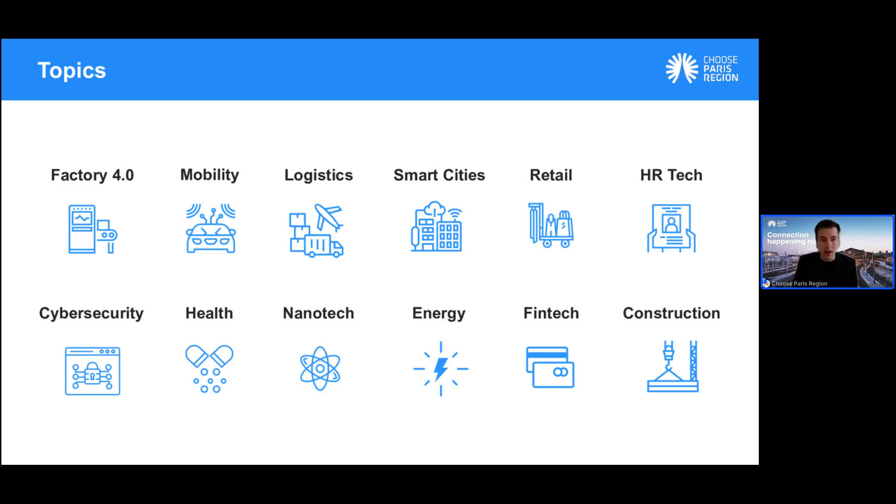Before we go to the overview of the hydrogen industry, I wanted to present the person in charge of the hydrogen department at Choose Paris Region, Sevinch Shimo. She couldn't be here today with us, unfortunately. So I'm going to give you some information about the industry and the different initiatives in the Paris region.

The Paris region is a key territory for the sector of hydrogen in relation to the energy transition. The region has pledged to make renewable energies account for 40% of Paris energy consumption by 2030 and for 100% by 2050. It's a big objective. Hydrogen is key for reaching this target, as the region aims at developing the value chain of green hydrogen based on local renewable energies.

In terms of application, we especially count on hydrogen for mobility and for small and medium-sized industries. We can see an increasing number of projects between industrial groups, institutions, and intensive transport players. Of course, not to forget the 2024 Olympic and Paralympic Games will be the first carbon neutral games and showcase the region's hydrogen solutions for athletes and spectators' transportation and electricity supply.

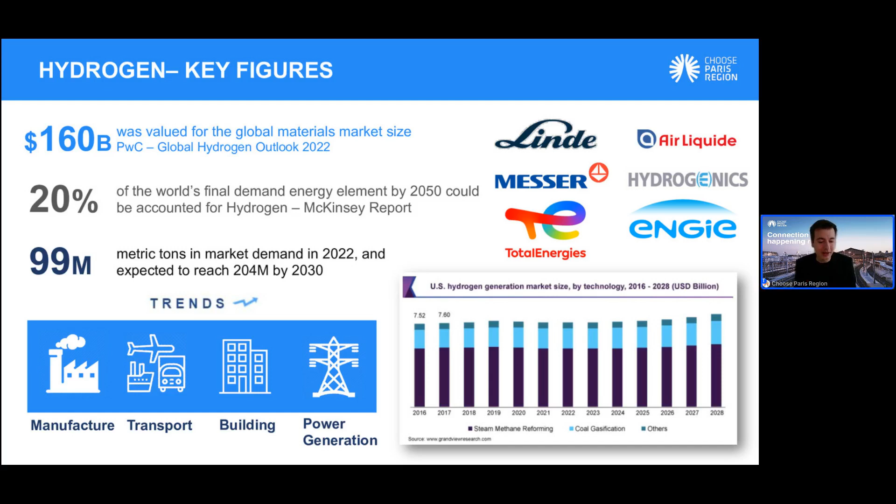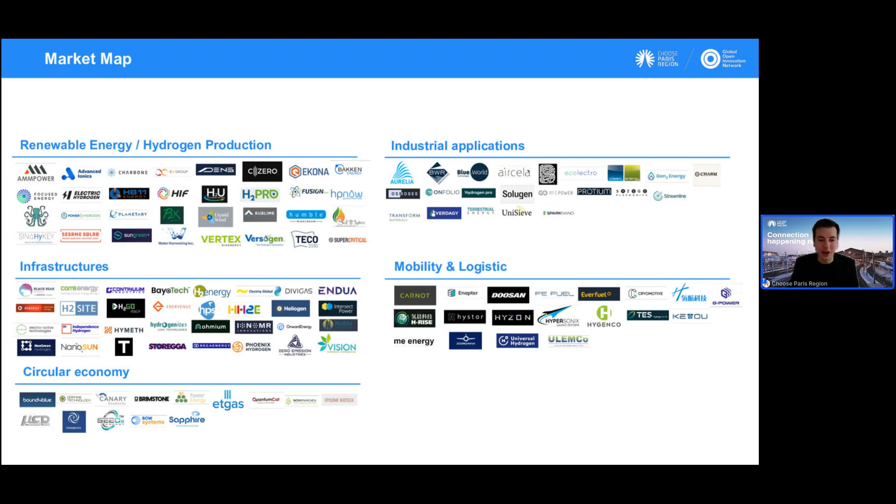Great. So without further ado, I'm going to invite our two experts today for the fireside chat. So Frank and Pete, if you can join me on stage. Hi, Frank. How are you doing? Hi, Florian. Hi, everybody. I'm very fine. What about you? Good? Yeah, I'm doing great. Thank you for being here today. So we're just going to wait for Pete. I believe he had some issues. Okay, I think he's here. I'm just going to invite him.

Great. So maybe we're going to first start with a presentation of yourself and the company you're representing, or the different initiatives at Engie, Frank, while Pete joins in a second. Okay, great. Thanks, Florian. Good morning, good afternoon, everybody. I'm Franck Le Baron. I'm working at Engie at group level for coordination around hydrogen, so I'm really dedicated to hydrogen. At Engie, we've got two feet. We are a gas company. We are a renewable energy company. So hydrogen is in the middle.

Hydrogen is in the middle because when you think about hydrogen today, I should have started with that. I don't know how familiar your audience is with hydrogen, but why are we talking a lot about hydrogen? What is new? Hydrogen has been used in industry for decades. There is... Yes, go ahead. There is noise, Frank. Yeah. Okay, that's better now.

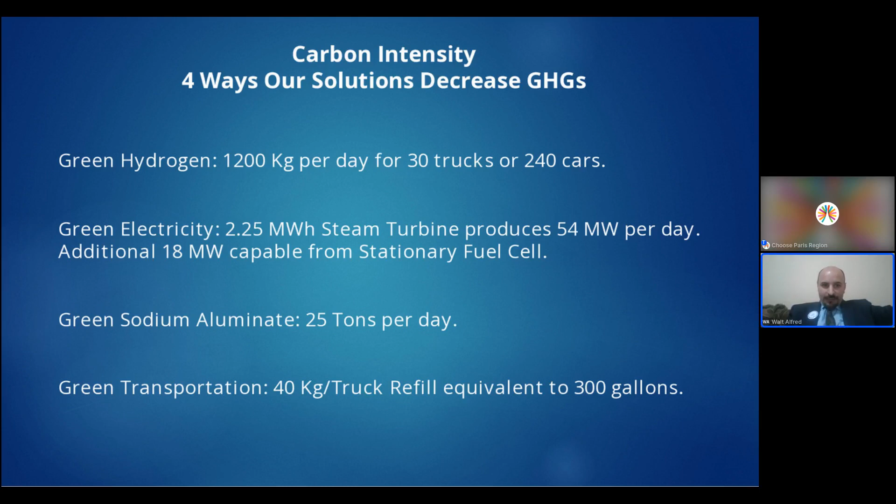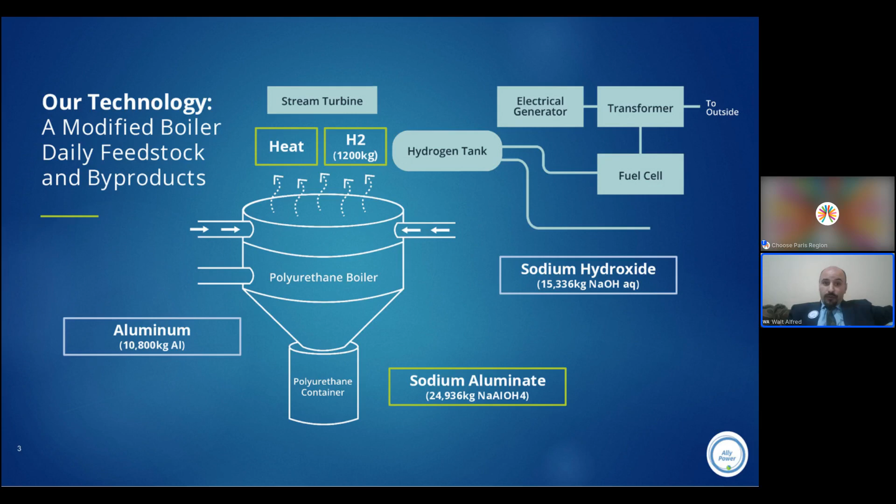Next slide. So this is a look at our patented hydrogen and electric refueling station, and this is how the back end of the station works. We feed aluminum and sodium hydroxide into the boiler, and that generates heat, hydrogen, and sodium aluminate. The electricity that we generate is given 2 different choices, to either charge electric battery vehicles or go to the grid. And the hydrogen that we generate is also given 2 choices, to either be dispensed to vehicles or be run through the stationary fuel cell. Next slide.

So as the previous speakers were talking about in terms of the hydrogen hubs, our solution kind of fits within that by being a distributed hydrogen station. We can place our stations along interstate highways to enable the hubs to be connected. Our stations will have a small footprint, around 2 acres, and provide on-site generation of electricity and hydrogen through the chemical reaction of aluminum, water, and sodium hydroxide. Next slide.

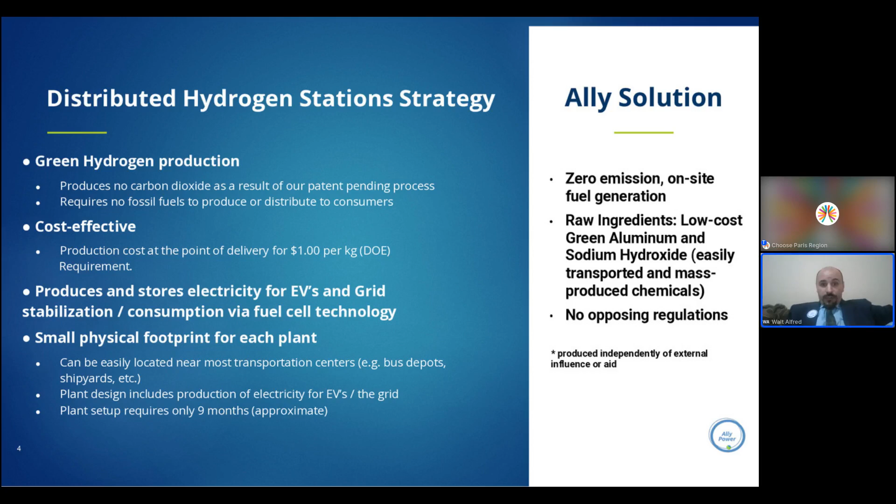And then the hydrogen produced on site will be given the choice between dispensing to vehicles or going through the stationary fuel cell. Next slide, please.

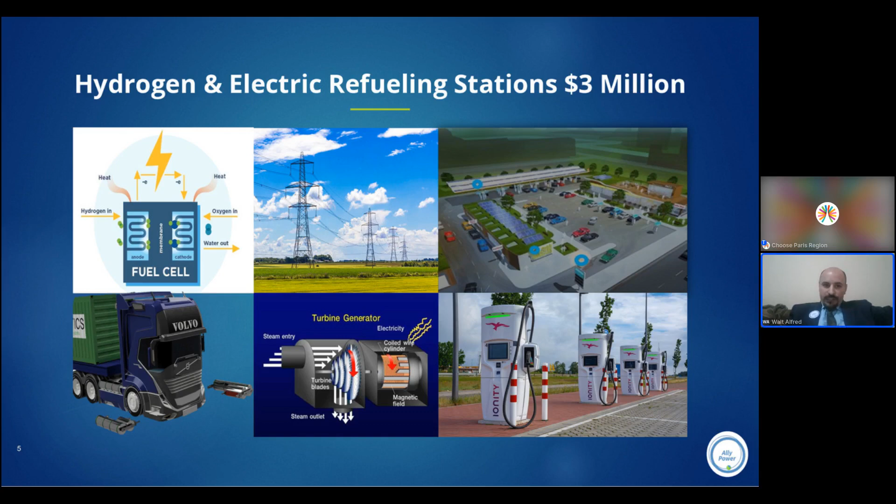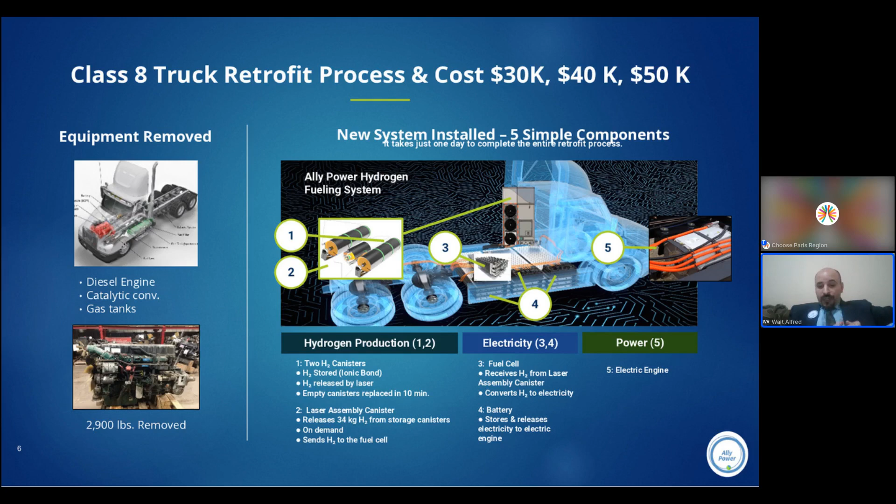This is a look at one of the vehicles that we are looking at in terms of retrofitting. We plan to take out the existing engine as well as the catalytic converter, put in a hydrogen fuel cell as well as a hydrogen storage system, and that will make the vehicle into a hydrogen fuel cell zero emission vehicle. We do have three price points for this conversion. The first will just make the vehicle zero emission, the second will extend the range, and then the third will provide extended range and vehicle-to-grid capability. Next slide, please.

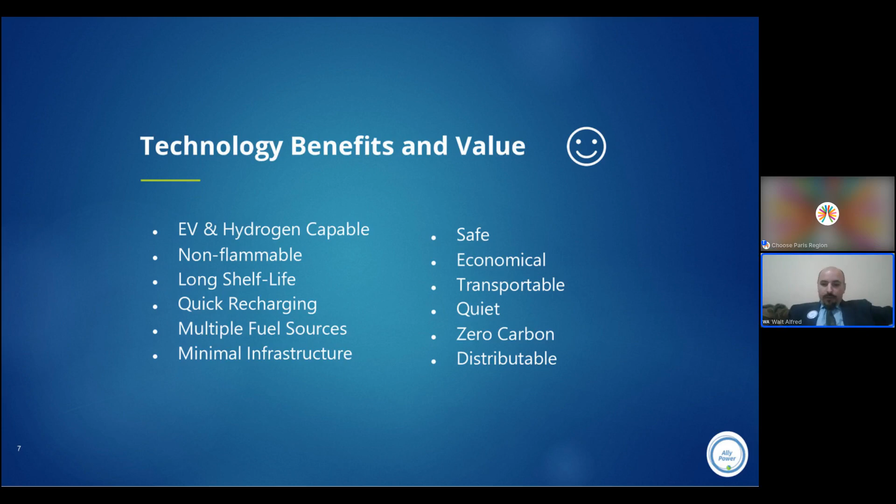So some of our technology benefits and values for the stations as well as the retrofits. We will be both electric battery vehicle as well as hydrogen capable. We plan to be safe, economical, distributable, and zero carbon. That's one of our major points, is that we will be zero carbon. Next slide.

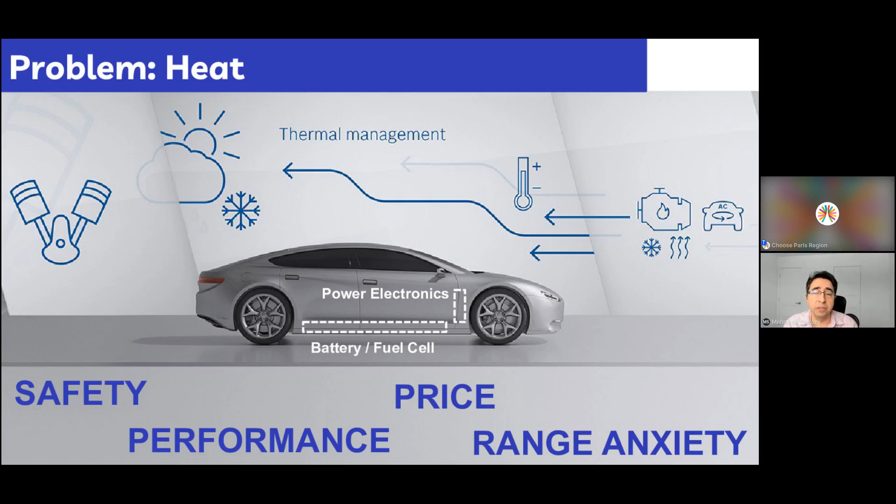This is our solution. It is called Uni.T for uniform temperature. As you can see, it looks like thin metallic plates. However, it has a thermal conductivity 10 times more than copper. It can also reduce aging in basically electric and hydrogen systems by 30%. It can increase the range in winter conditions for electric vehicles by 35%. And also it is passive, no connections, very reliable and low cost solution.

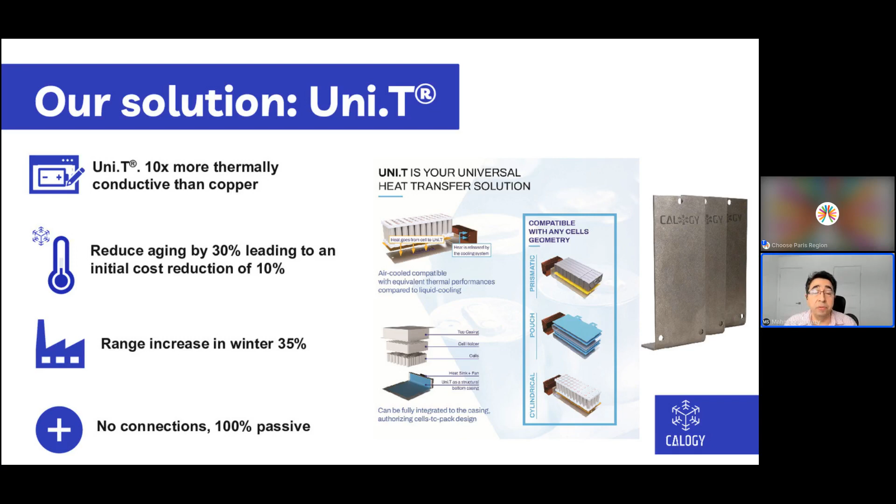For the batteries, it is compatible with prismatic, pouch, and cylindrical, and we're now exploring the use of this for the thermal management of fuel cells. Next slide, please. The way it works is based on the heat pipe legacy. So basically liquid vapor phase change. That's why it can offer this very high thermal conductivity. It is thin and, as I said, very lightweight. Next slide.

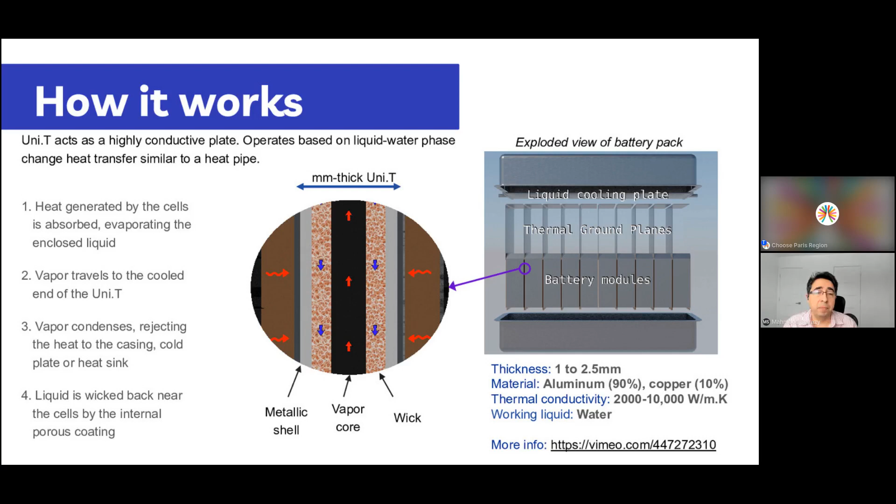So for the fuel cell, it's an application that we are exploring now. Thermal management in fuel cells is an issue because the fuel cells generate a lot of heat and they need to operate in a specific temperature range. Our solution has some interesting features. First of all, it is thin, it is lightweight, and it can be put between the bipolar plates. It can provide a uniform temperature, which is extremely important in the lifetime of both fuel cells and batteries. And it has a very high heat capacity. It can transport a lot of heat without any problem.

In terms of integration, it works great with air cooling systems. I mean, better or equivalent to liquid cooling systems, which is really an innovation. It is low cost, very reliable, as I said. And also we can imagine creating microchannels for air and water transport to be used directly as bipolar plate in a fuel cell. Next, please.

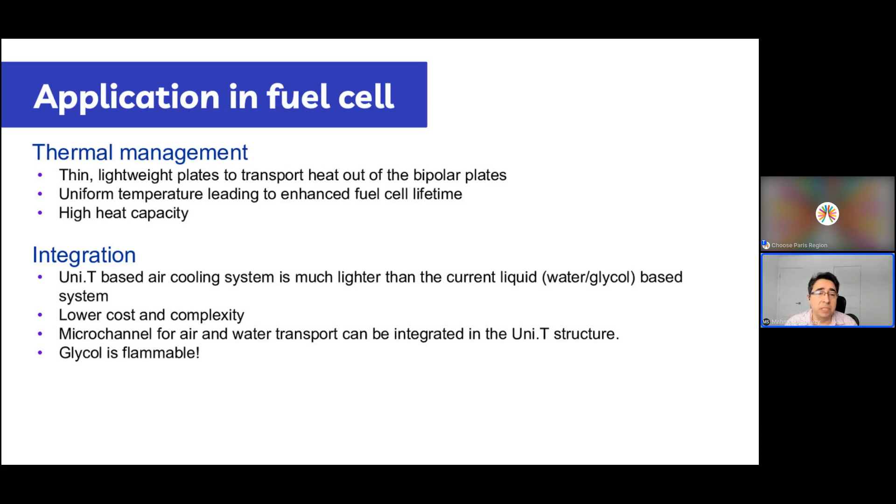So these are part of our customers and collaborators. As you can see, in lithium-ion batteries, we work with companies in aerospace, Bell, Unither. We also work with a large automotive OEM. For hydrogen, we're working with Safran in France, also Bell, Unither again. And with power electronics, we're working with a large German technology company and a tier 1 automotive technology company. Next, please.

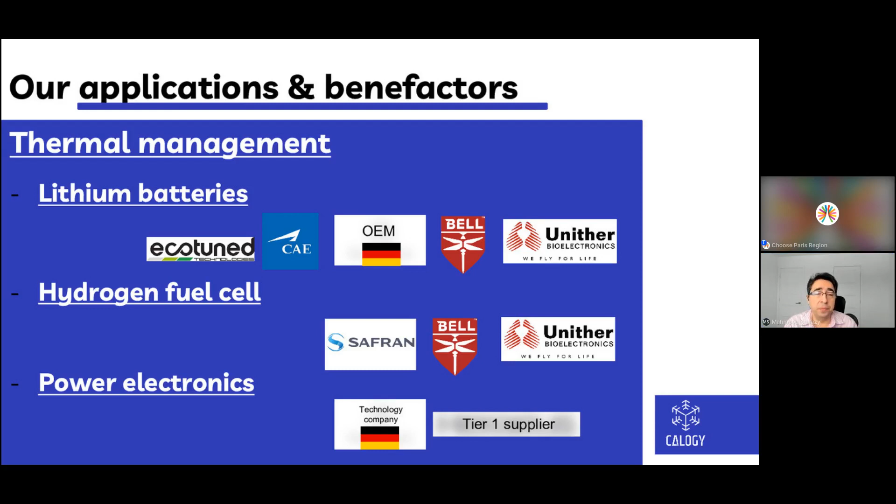So our business model is based on making and selling the components. We are basically a manufacturing company. We're not a consulting company. However, the first part of our projects starts with a thermal study. We look at the customer's current system, we analyze it, and then we propose a new kind of integration using our components. I should mention that we can offer, and we have actually done, the whole system, the turnkey thermal management solutions, and not only one component.

The next stage is that we prototype with the customers. We make some prototypes to test the results, and finally we sell them the parts. Our early adopters have been mostly aerospace and marine, so niche markets. But our goal is really automotive markets for the high volume expansion of the company. Next, please.

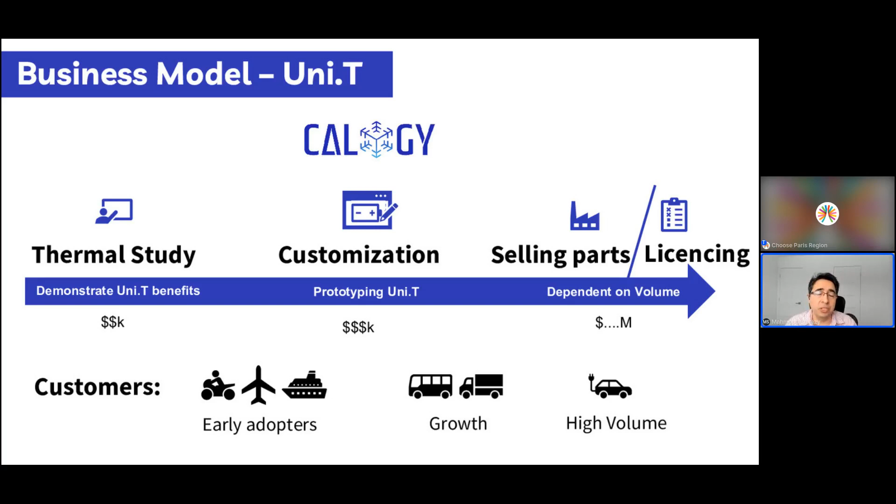So now why work with us? First of all, you will have access to an innovative and game-changing thermal management technology. It could be applied to a range of different thermal challenges in future transportation. As I said, batteries, fuel cells, and power electronics exist in all these vehicles at different levels.

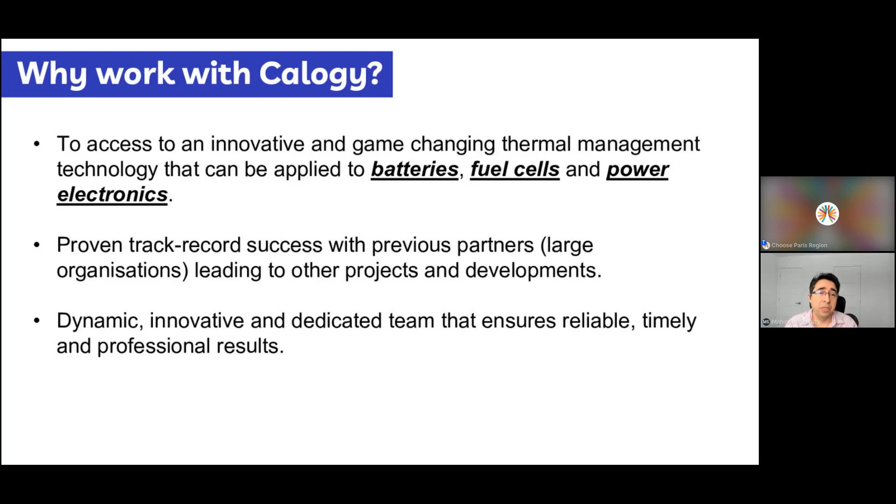We also have a proven track record of success with previous partners. We are used to working with large organizations, and typically they're very satisfied. They start with one project and then they bring other teams to work on different projects with us. And finally, we have this dynamic, innovative, and dedicated team that really ensures reliable, timely, and professional results for your company. Next, please.

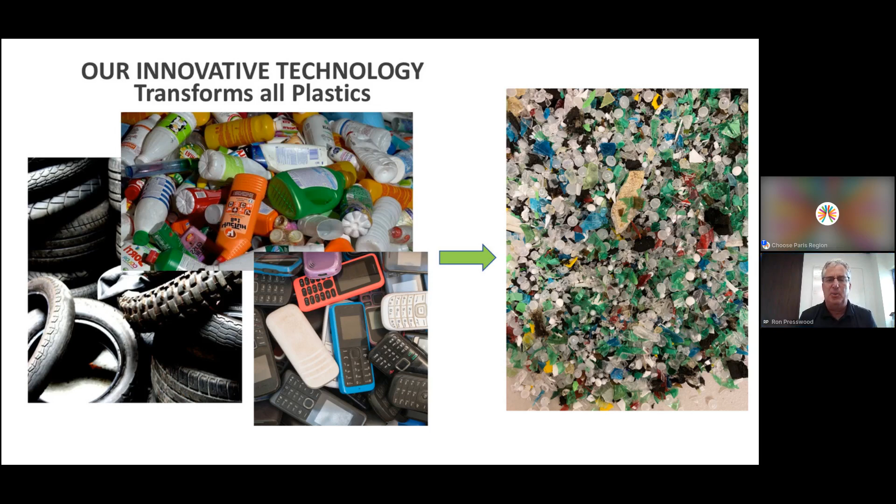So, there's a lot of discussion this morning on what hydrogen can be used for. We're in Texas, so there's a lot of hydrogen pipeline that runs from Louisiana all the way down the coast of Texas. So you have industrial transportation and hopefully growing into a home market. Next slide, please.

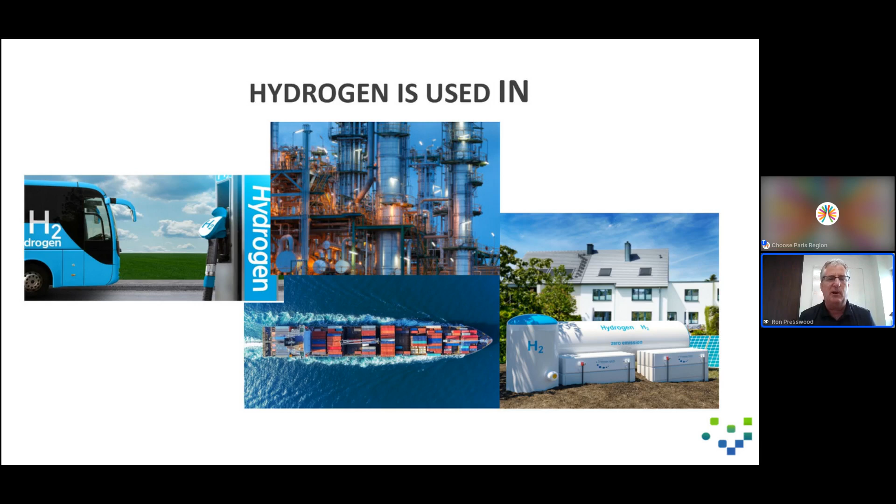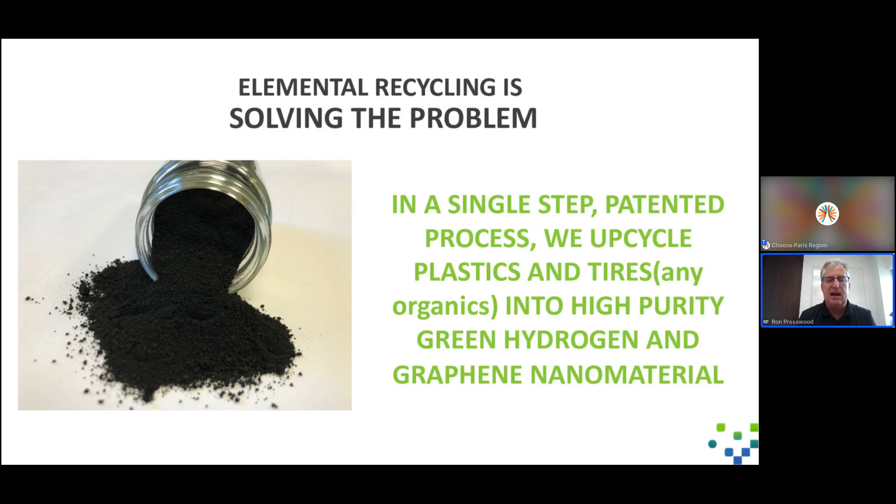So what we do is we have a single step patented process. We upcycle those plastics and tires, really any organic, and we produce a high purity green hydrogen and a graphene nanomaterial. Next slide.

So fairly simple process. We, as I said, single step. We can take any of the commercial plastics 1 through 7, virgin, contaminated, film, bioplastics. We run it through, and we break that down into the elemental bonds: carbon, hydrogen. You'll see some sulfur. There's sulfur in the plastic. But we recover all of that.

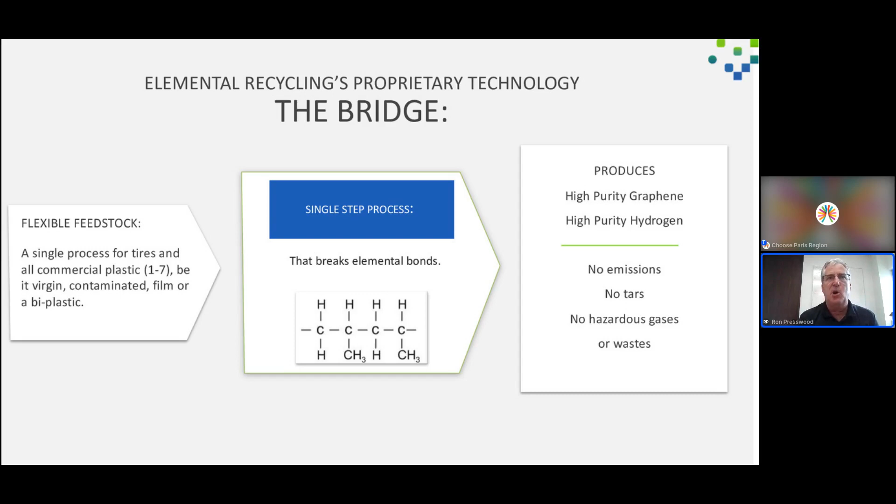So while we produce that high purity graphene and hydrogen, we have no emissions, no tars, no hazardous gas or waste. As a matter of fact, to date, everything that's come off the process has had a commercial value for us. Next slide.

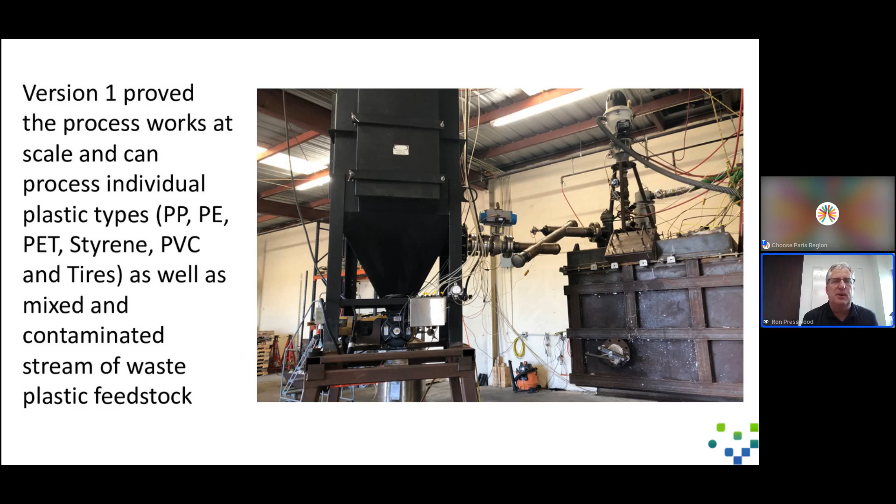So this is our version 1. This was the full-size test machine that we made. Through that, we ran polypropylene, polyethylene, PET, styrene, PVC, tires, a lot of material that was destined for the landfill. So floor sweep, other contaminations, it might have been titanium dioxide or labels or metals, but we ran it through this process. Next slide, please.

We're currently in the process of finalizing version 2. We're going to be doing acceptance testing of that machine the end of this month, and it will be delivered to our facility here in Houston. But the company that built the machine is international, so we can build these in Europe. We're actually talking to a company in Australia right now about partnering with them.

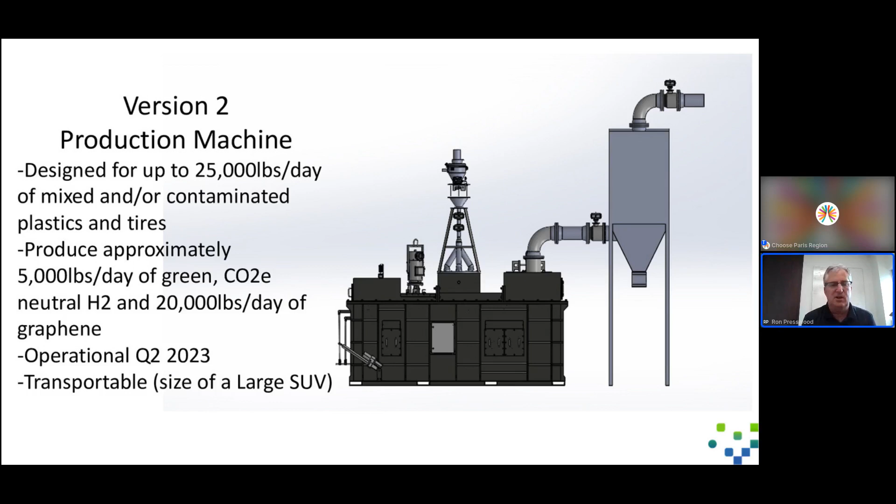Depending on the material that you put in, if you're putting in polyethylene, polypropylene, it's designed to run about 25,000 pounds in this current size of machine, and you'll produce about 5,000 pounds of green CO2 neutral hydrogen, the remainder being graphene. So the machine itself is about the size of a large SUV. Next slide, please.

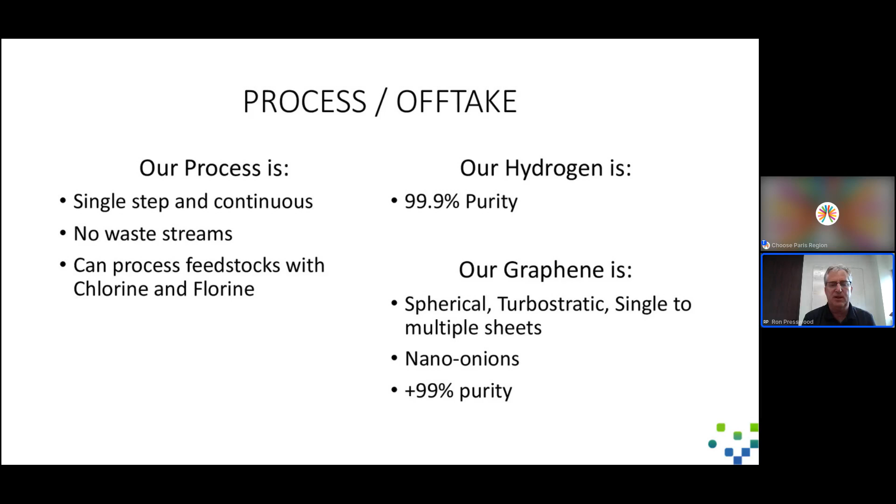So kind of a summary slide here. Single step continuous. We run 24/7. No waste streams. We can process a lot of feedstocks, including the halogenated, polyvinyl chloride, brominated plastics, those kind of things. Our hydrogen is 99.9% pure, and our graphene, we're making a spherical turbostratic single multi-layer graphene, carbon nano-onions, with a 99% purity. Next slide, please.

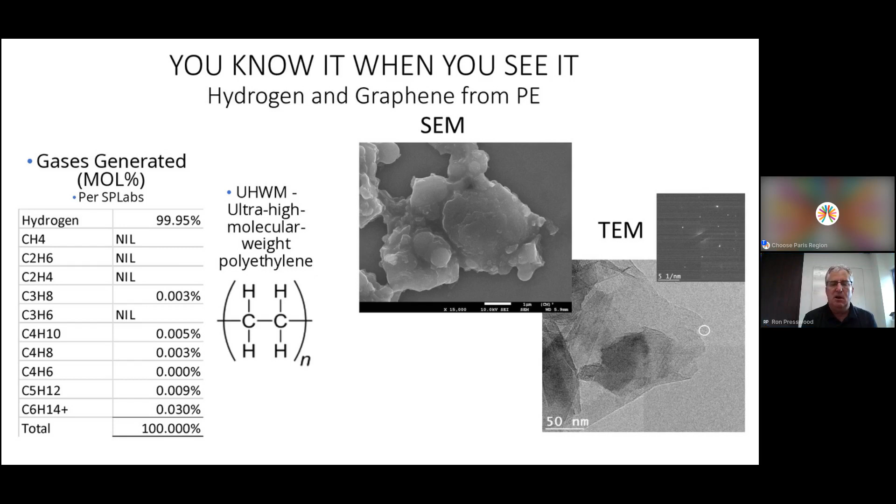So this is results. The gas sample was done by Southern Petroleum Labs here, and then images of the SEM and the TEM of the carbon that we've produced, the graphene. Next slide, please.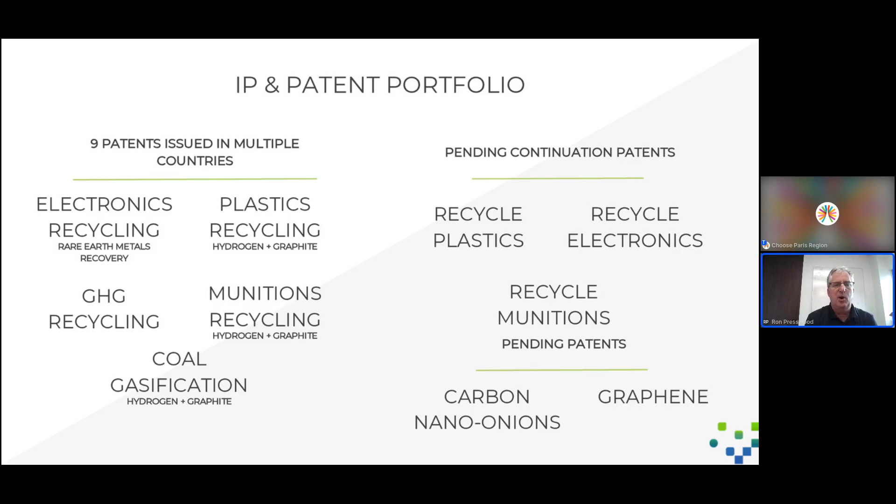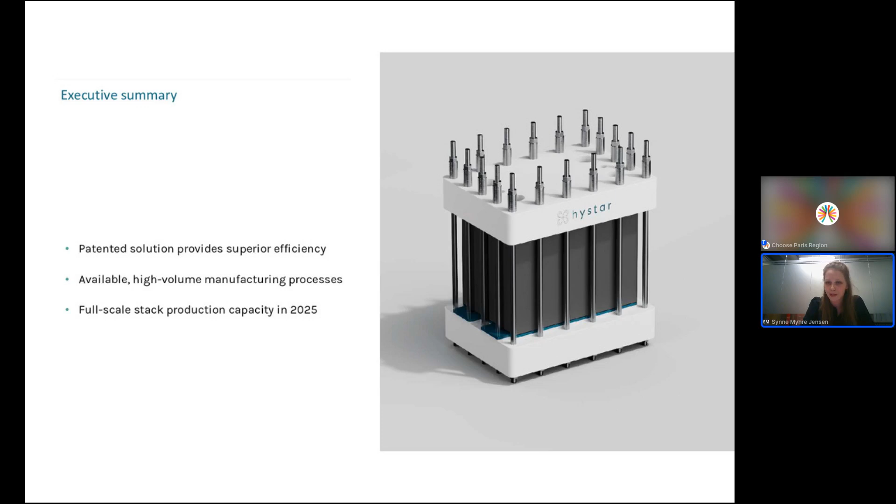On the left-hand side of the figure, you can see the conventional PEM electrolyzer. And in the middle part, you see the membrane. All electrolyzer manufacturers are trying to reduce the thickness of the membrane because the thicker the membrane, the larger are the losses in the system due to heat.

But here's how Hystar has solved this problem: hydrogen can cross over the membrane to the oxygen side, and if the membrane is too thin, this will happen, giving you an explosive mixture on the anode side. So how we solved this: we changed the water inlet from the anode side over to the cathode side. This opens up the possibility to ventilate with air on the anode side, so if any hydrogen crosses over our thin membrane, we can just dilute it with air.

This gives several advantages. We get a higher efficiency, and we get higher control of our stack, giving an increased safety feature. It also enables us to use components from the fuel cell industry, which are already standardized and mass produced.

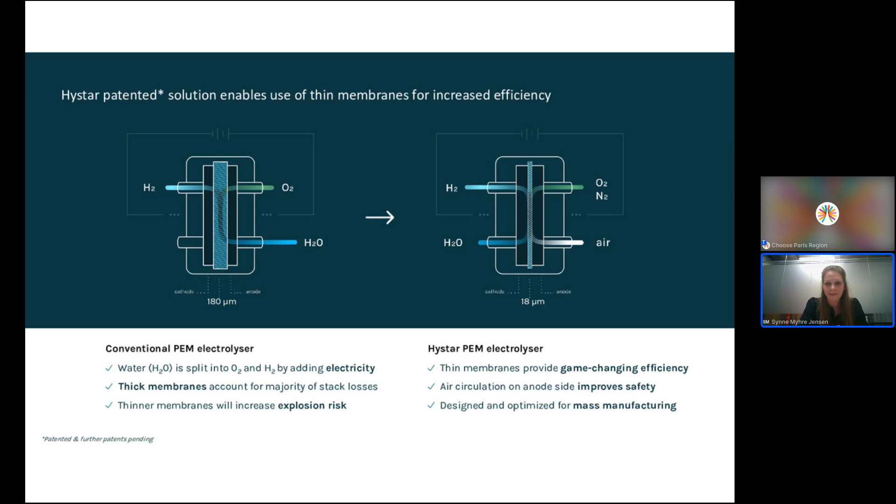We have 2 different ways of operating our system. We can either run it at conventional production rates, where we use about 10 to 15% less energy than others on the market. Or we can run it at the same amount of energy as other PEM electrolyzers, and then produce about 2 to 3 times more hydrogen from that energy.

So if you have a renewable system with PV or a wind park, when you have excess energy you can produce a lot more hydrogen in those time points, and then you get a much better business case.

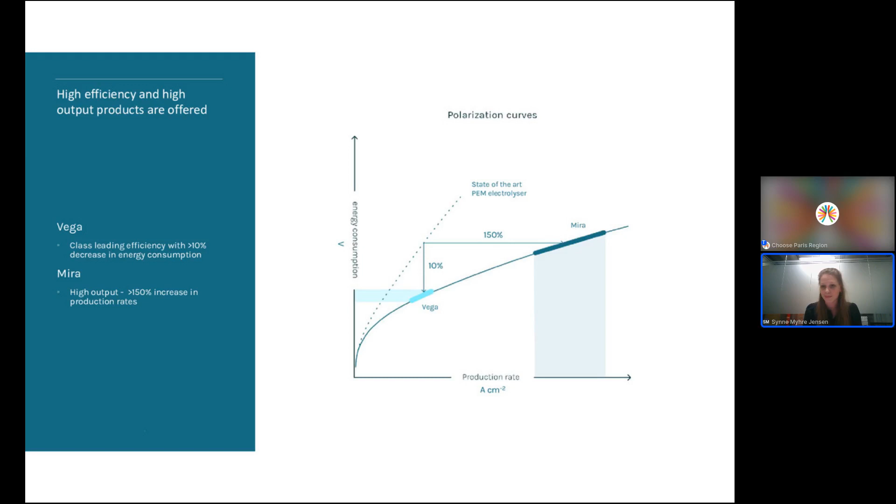At Hystar, we produce stacks that go into our containerized solutions, and we produce modules that go into large plants. At the moment, we have about 100 megawatts of production capacity for the coming year and about 200 megawatts for next year, and in 2025 we will have over 1 gigawatt of production capacity.

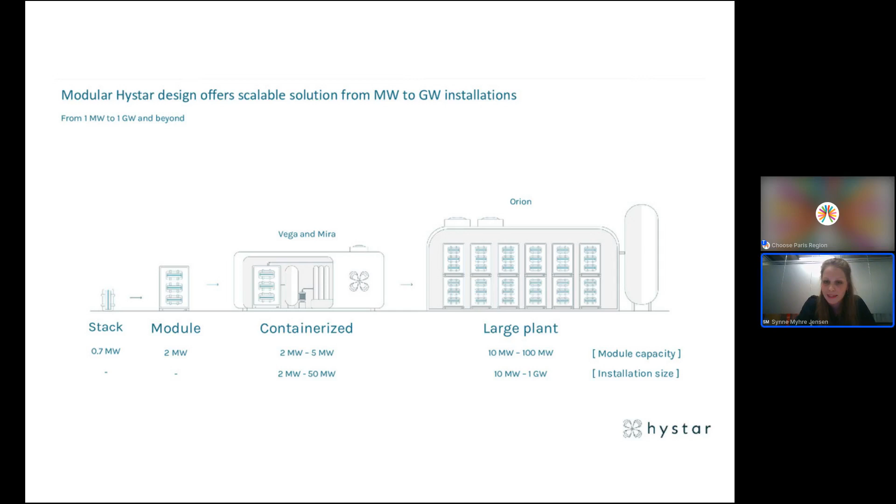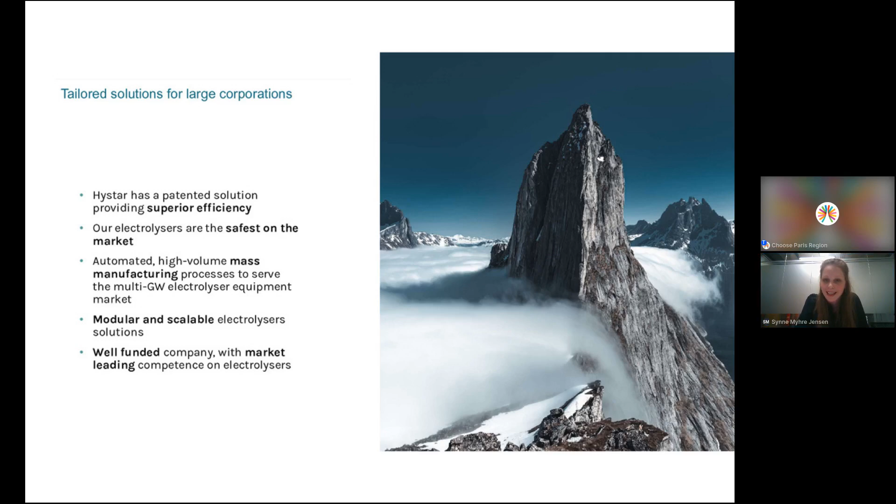At Hystar, we have a patented solution providing superior efficiency. Our electrolyzers are the safest on the market. We have an automated high-volume mass manufacturing process to serve the multi-gigawatt electrolyzer equipment market we've been talking about today. Our solutions are modular and scalable, and we are a well-funded company with market-leading competence on electrolyzers.

I would just like to add that if you want to discuss more about how we can look into electrolyzer systems, please get in contact.

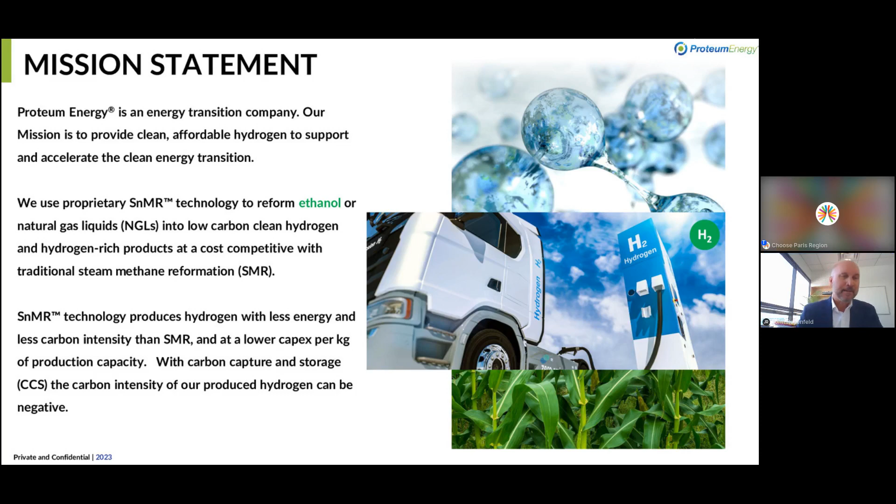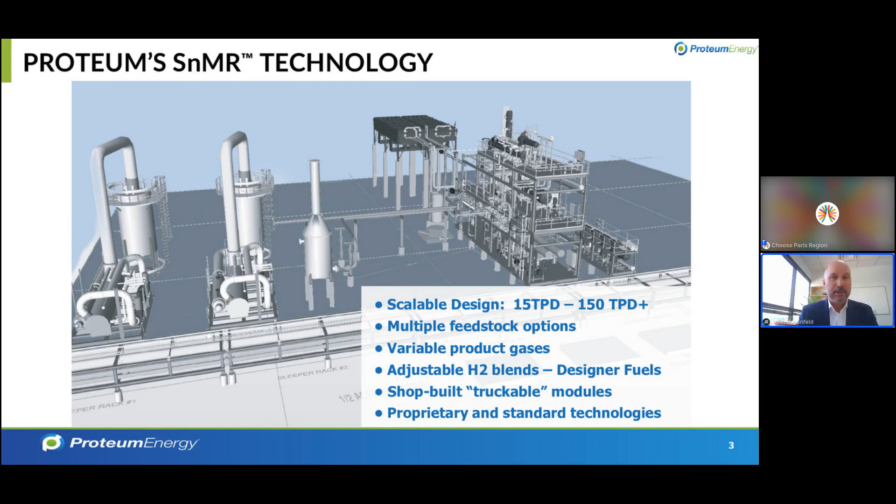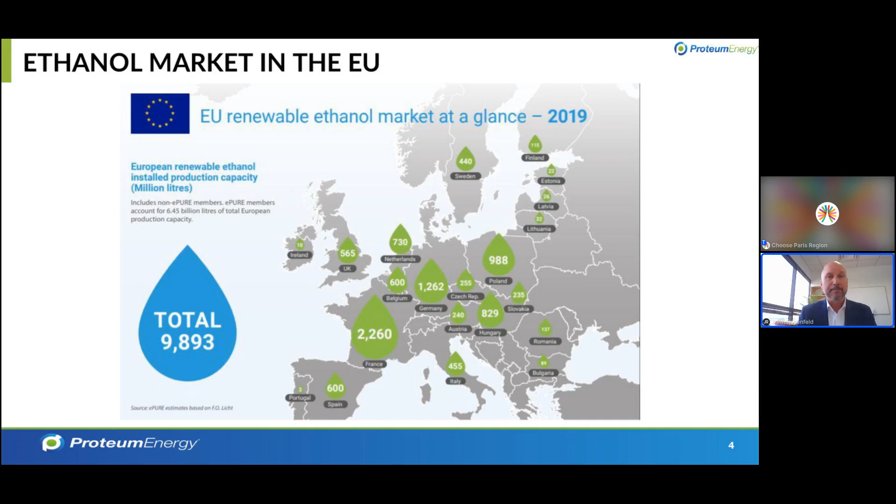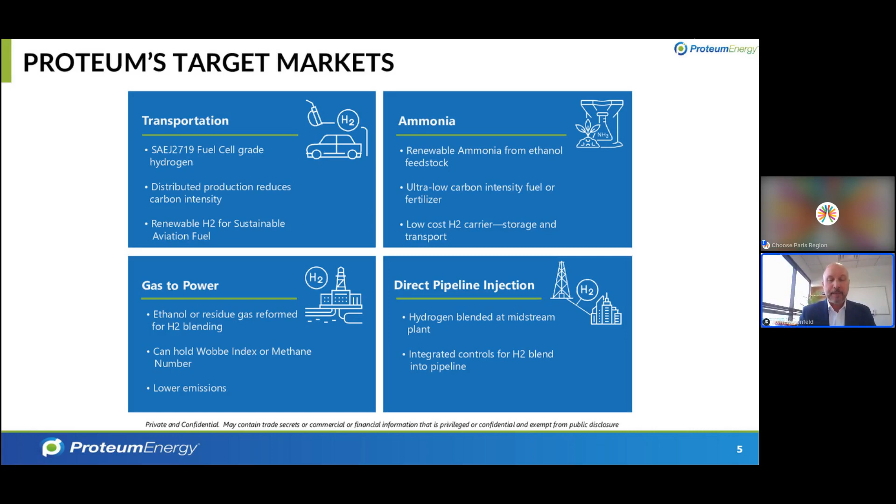Our target markets are transportation, gas to power, direct pipeline injection, and low carbon ammonia. On the transportation side, we're working with fuel cell truck manufacturers and refueling companies to implement their fueling strategies in California and throughout the US. Sustainable aviation fuel is another application for our low carbon hydrogen. On the gas to power side, we're working with a power company to mix hydrogen produced from ethanol into its turbine fuel. And ammonia is a natural product extension for us.

Our SNMR reforms feed gas and steam into a reformate. CO2 and hydrogen are then separated using industry standard process modules. Our products include fuel cell grade hydrogen, hydrogen-rich designer fuels, synthetic natural gas, ammonia, and CO2. When residue gas is used as a feedstock, our base system produces 14,700 kilograms per day of hydrogen. With ethanol feedstock, the base system produces 19,000 kilograms per day of hydrogen and 320 metric tons per day of biogenic CO2 available for sequestration or utilization in products such as e-methanol.

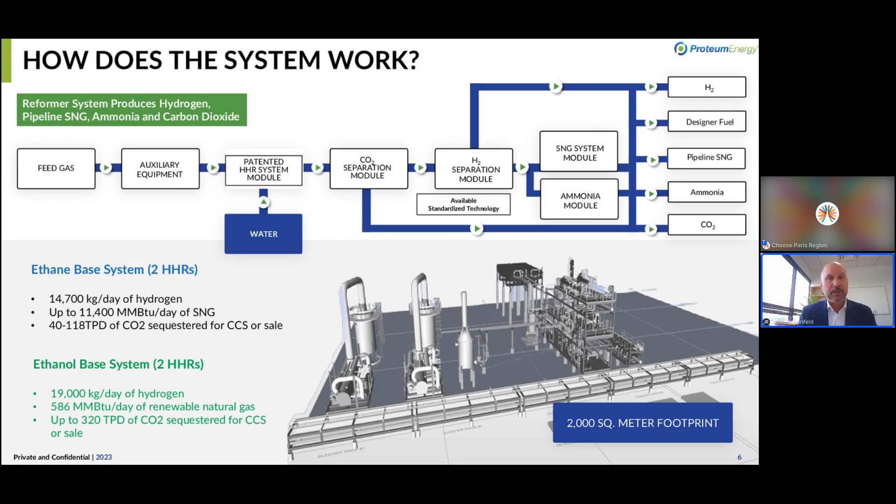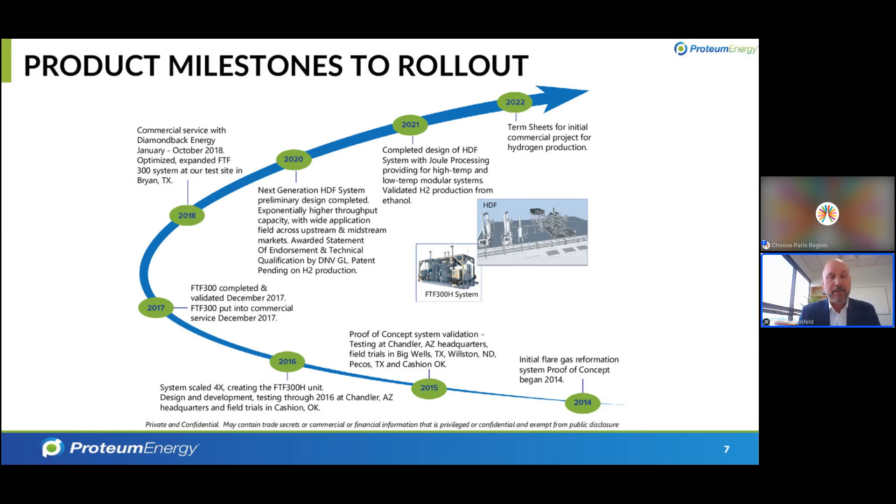Our technology has been developed over 7 years with an investment of over $65 million. The core technology was used in commercial operation in 2018 to reform flare gas into SNG. The system was then upsized and optimized for hydrogen production and is ready for feed engineering and installation. We have a demonstration facility in Bryan, Texas.

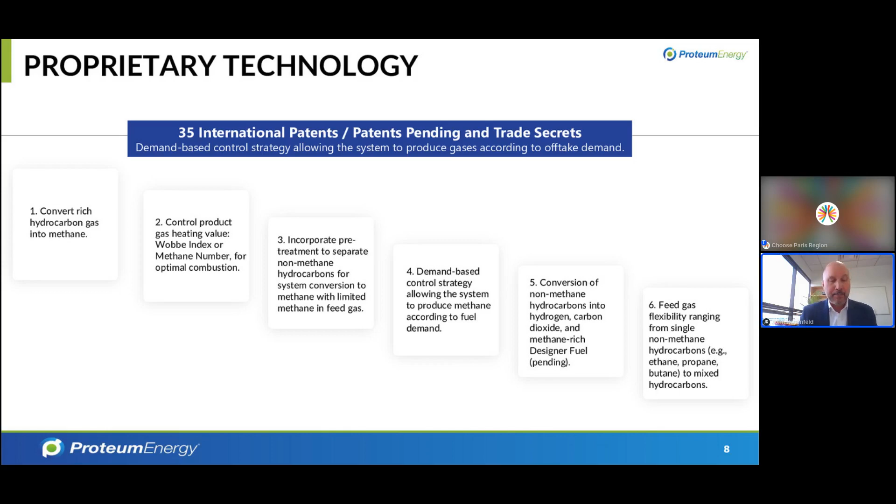Proteum Energy has 35 patents and patents pending, including an application with the European Patent Office.

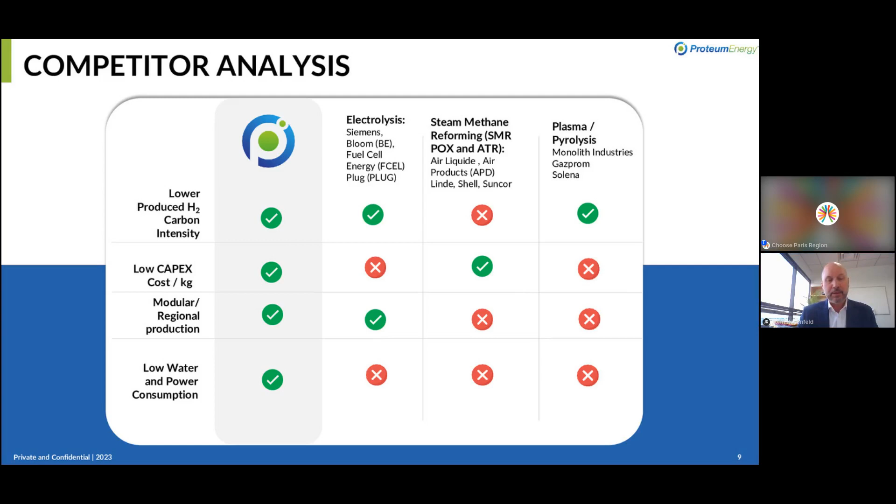This chart highlights how Proteum's SnMR stacks up against other technologies. SNMR has low carbon intensity, low CapEx per kilogram of production, is modular and scalable, and has lower water and power usage.

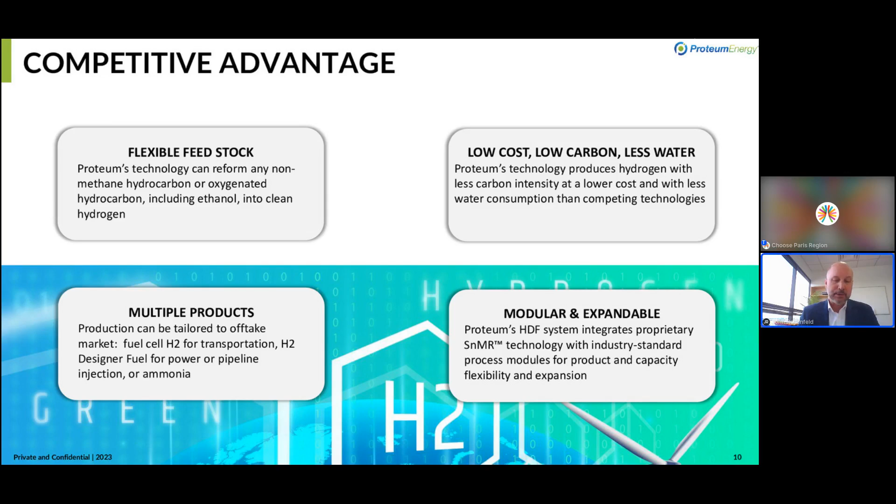Here's a recap of some of Proteum's competitive advantages: flexible feedstock, multiple products, flexible design, low cost, low carbon, and low water usage.

Our business model is flexible. We can produce hydrogen on a build, own, operate basis or on a tolling basis. We can partner with a producer or offtake partner and produce hydrogen at their location.

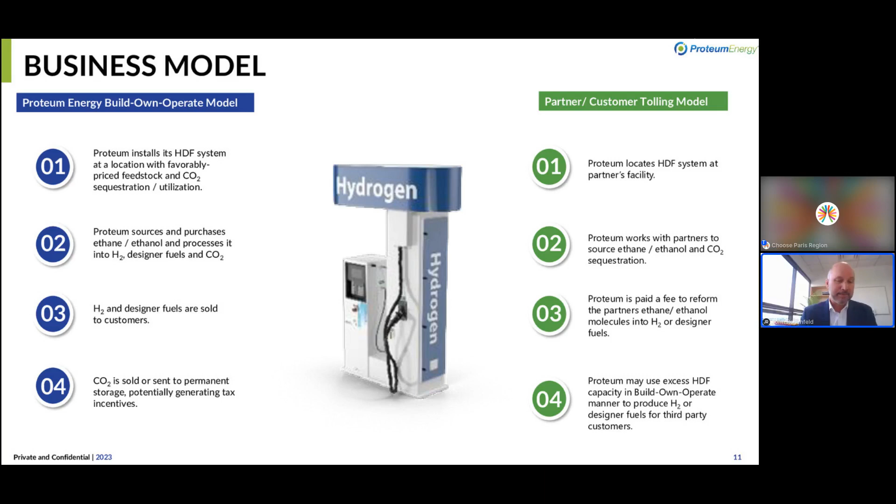2023 will be a busy year for us. We're working on projects in California, the Appalachian region of the US, Nebraska, Kansas, North Dakota, and the UK.